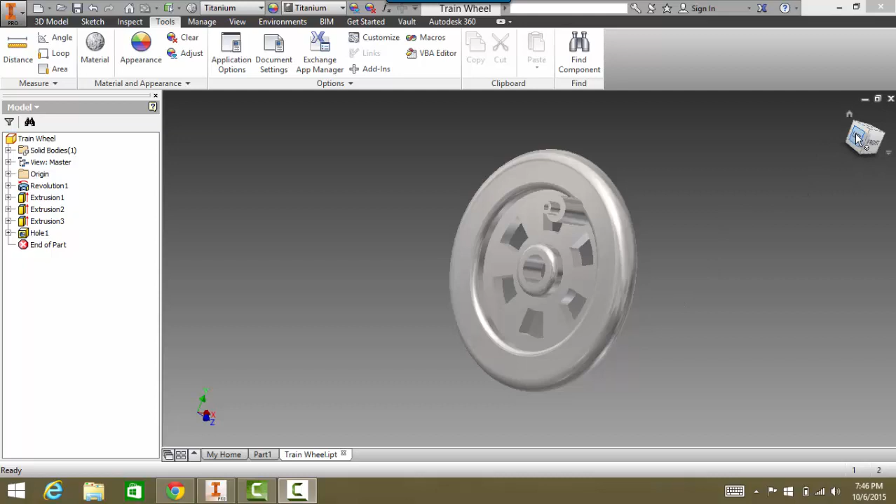All right, let's build the wheel. This is the last part of the train. Hoping somebody in every school will build a track as well so that it can sit on something all pretty. But this is the wheel, so this is our last part. Here's a wheel I built earlier. It's a nice titanium wheel. And we'll start from scratch on a wheel.

Like everything, we'll start with a 2D sketch. Now, I'm actually gonna not start with that 2D sketch. I don't want to go on this plane because I want it on a horizontal plane, because I'm going to build a profile, revolve it, and then I want the front to be actually a little bit different. Over here, this is even sitting weird, so I'm going to go like this. I'm looking directly down the top. All right, so there we go.

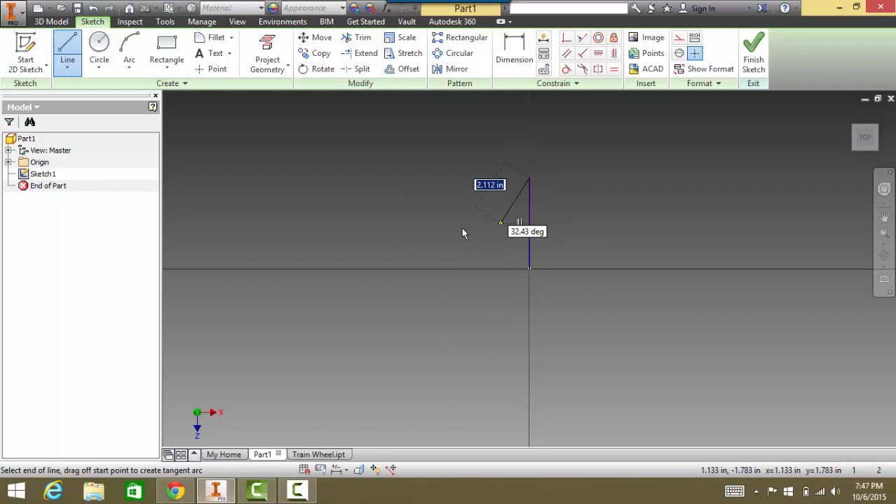So this, because I'm going to revolve, first thing I'm going to do is put an upright line right here. And the sole purpose of this line is to give me something to revolve around in a minute. Because I'm not going to have a shape touching the line, but I do have to have an axis to revolve on. So that's what that's all about.

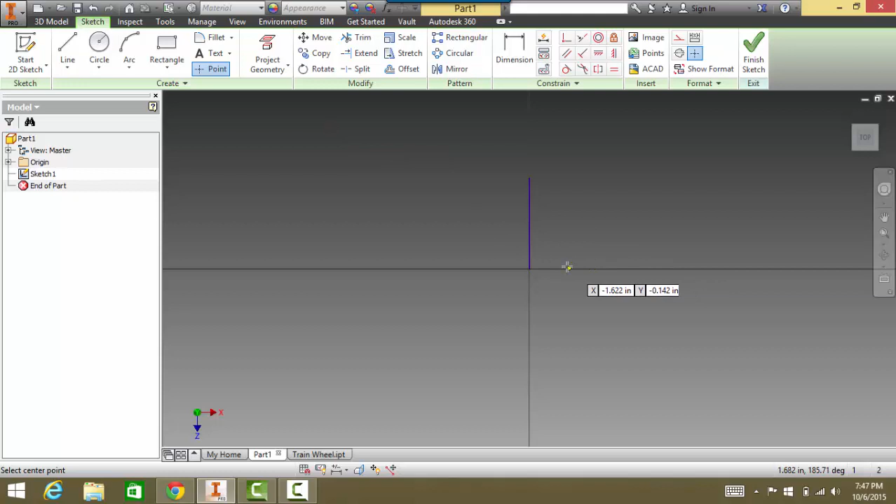Now, I'm going to put some points down. I'm going to put a point right here. This point is going to give me a starting point for a rectangle. So I'm going to have a rectangle start right here. And the rectangle, there's actually an axis, the hole in the wheel. I don't know what you call that. The hole in the wheel is 0.28. And that has to do with the axle peg we have, which is like 0.25, so there's a tolerance, all that sort of stuff.

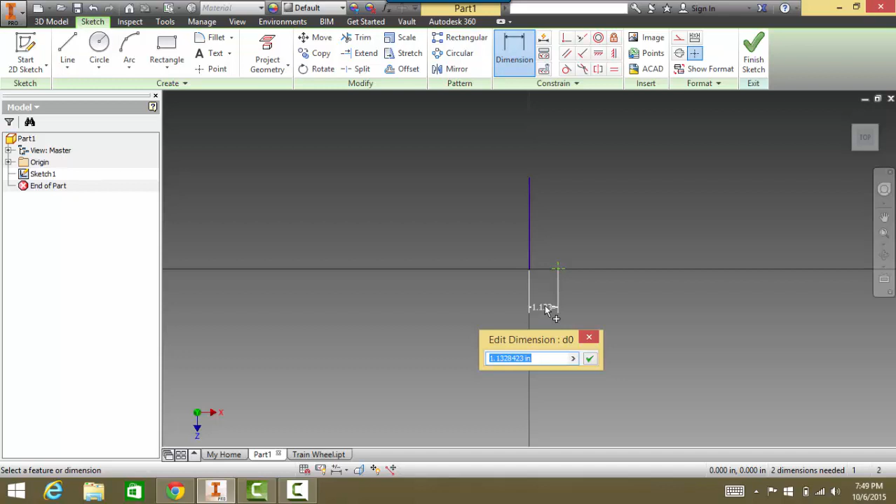Anyway, this is 0.28, but because I'm going to revolve it, I need just half of that, 0.28 divided by 2. Whoa, that's tiny. Let me zoom in on that. Right here is where I want to start a rectangle from, right on that corner. And come out here a ways. So looking at my drawing, this end of this rectangle is going to have a half circle on it. But before I do that, this point that is the center of that circle that's going to make the edge of my wheel needs to be 1 inch from here.

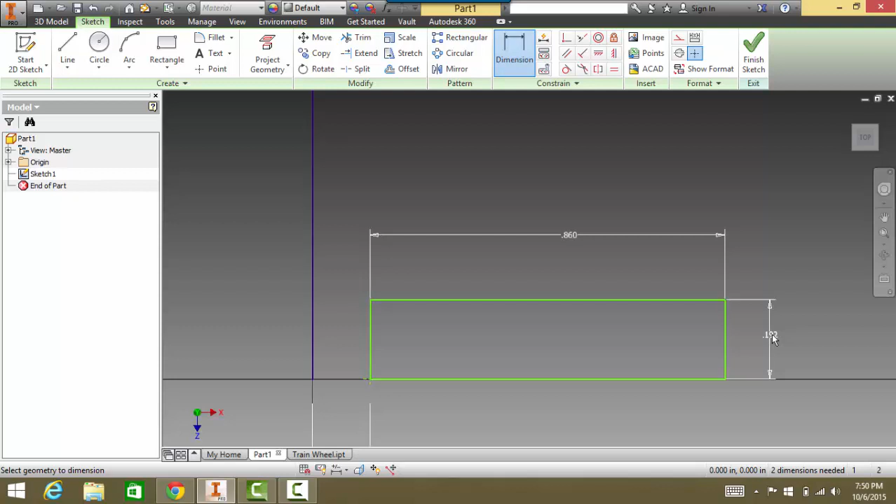Well, I'm not sure exactly what that needs to be, other than I know that from here to here needs to be 1 inch minus that 0.14 that was right here. So now it's 1 inch minus 0.14 plus 0.14, so this from here to here is 1 inch, and that's what it needs to be. I also have to do a dimension here, and that one I think is 1/4 of an inch. So let's make that 0.25. All right, so there's a rectangle that I'm going to start working on now.

I need a circle out on the end of it, right in the center, and make that have a diameter of 0.25. In a while I'm going to do some trimming, but I'm actually going to do a lot of building before I do any trimming in here. All right, so I need a couple more points. I'm going to put a point right in here, and I'm going to put a point right over in here. Now, obviously I'll need to dimension these 2 points.

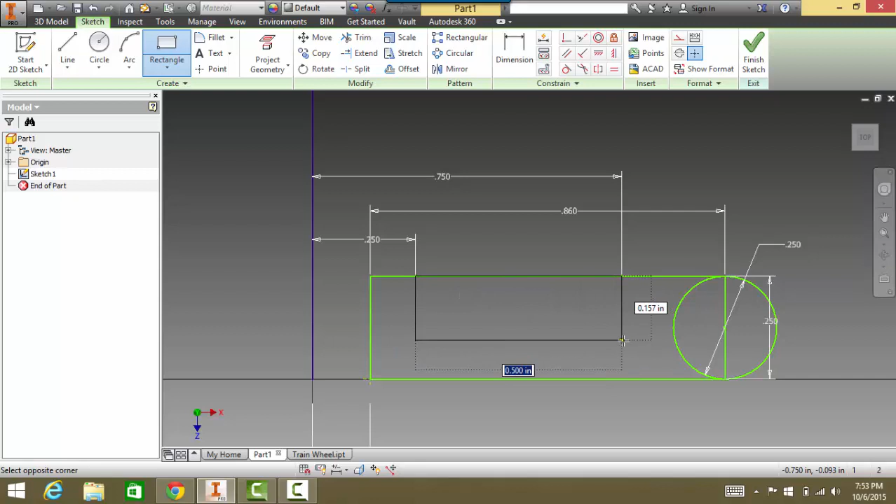This farther point, right here to right here, needs to be 0.75. This closer point from right here to right here needs to be 0.25. Now, the reason I did that is because right in here, I'm going to make a rectangle and then trim it out in a minute. So let's do that. I'm going to go right here and come locked into that point over there, make a rectangle. Now I need to dimension this rectangle right here. And that dimension needs to be 0.125.

All right, so we can start to see what's going to happen. I'm going to have this general shape revolved around this axis, but I have to do quite a bit of trimming up. I also want to do a fillet. And the fillet measurement I want is 0.0625, I'm just looking at that from my drawing. And it needs to go right there. Ooh, something is up weird here. It needs to go right there, and it is non-existent.

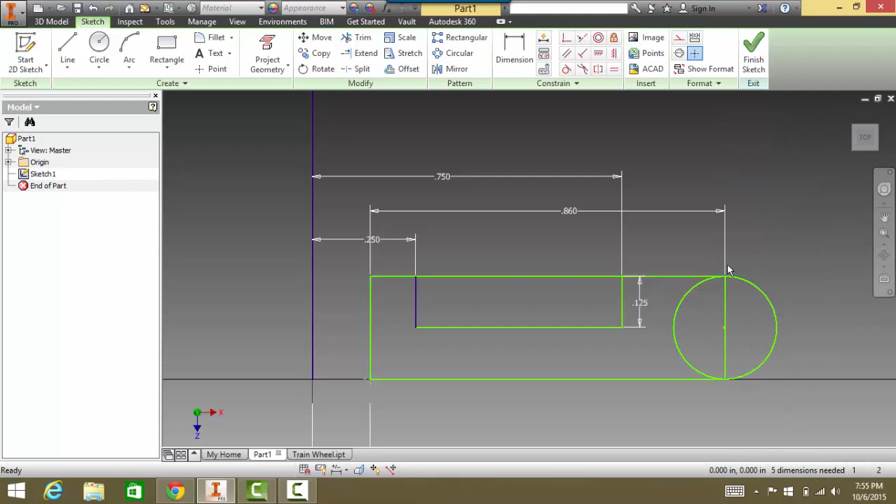Hang on, let's figure this out. Well, that kind of messed something up over here. So when I mess up, what I generally do is Control Z and try something different. So I'm going to worry about doing my fillet here in a moment because that messed it up. So now that I have all of this stuff here, I'm going to delete a bunch of dimensions and go about trimming off the stuff I don't need. So here we go with all these dimensions going away, so that when I go to trim, it doesn't give me that error message. And so what don't I need? I don't need this.

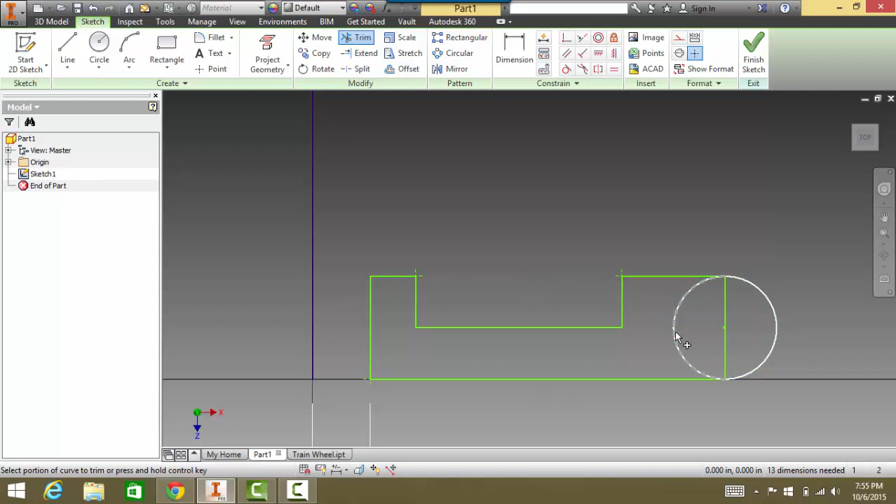I don't need here, here, here. That looks pretty good, really. Sometimes I miss something, I can come back and get it later.

But I think that's about what I don't need. So now let's go to the fillet. I've already entered in my 0.0625. And I want to fillet that corner right there, and this corner as well.

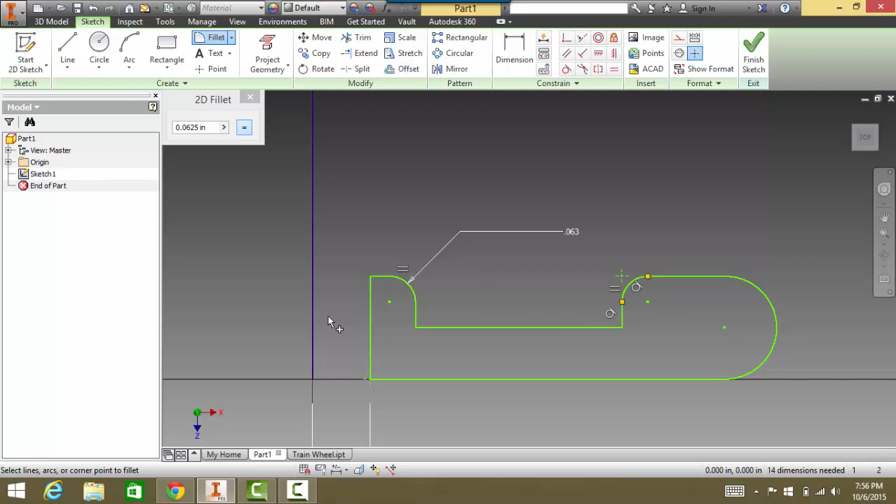So now I'm pretty close. This is the thing that's going to revolve clear around. So that looks pretty good. I'm going to finish my sketch. Kind of gives me a weird look on it here.

But now I want to revolve this thing. And it's messing with me a little bit as far as how it's sitting there. So, oh, I get it.

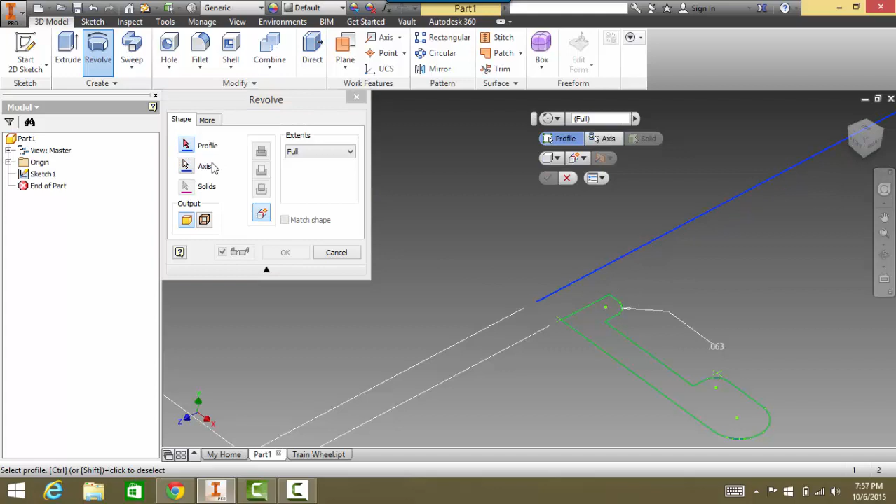All right, so I'm going to revolve, my axis being this, my profile being this. Wham, there it is. All right, let's spin it around a little bit, see what I have on this back side. Yeah, that's what I wanted to do.

So we've got it revolved and we're getting close. We've got to add some holes in it, and then I don't know what the deal is called that you hook the linkage arm to so the train can move.

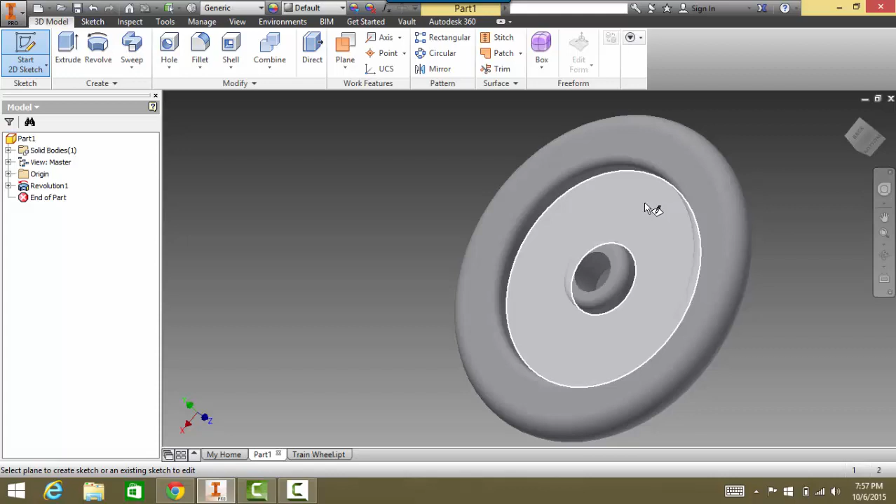All right, so let's do a drawing on here. I'm going to make a drawing on this face so it will square up to me. It's one of our first chances to do what's called a pattern. Maybe we've done a pattern before, I don't remember it though. And it also is going to give us a chance to dimension angles.

So what I'm going to do is grab my line tool and draw a line straight up. Actually, I don't know how far to draw that line yet, so I'm going to Control Z and not draw that line straight up yet.

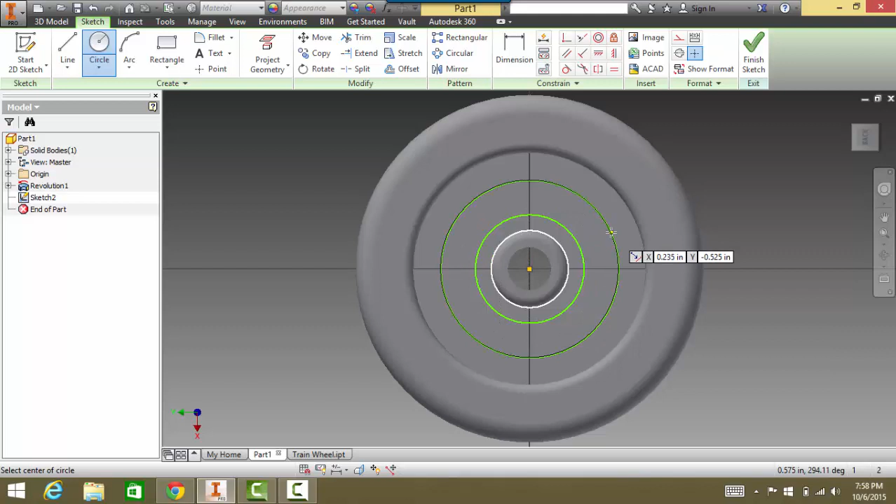What I want is a couple of circles. I want a circle right here, and then I want a little bit bigger circle out here. Now I need to dimension these circles so that we have them right.

So the smaller circle is 0.375. Whoa, something's not right about that. Oh, it's 0.375 times 2 because I was reading a radius. Much better. All right, that's my smaller circle.

My larger circle, this one out here, is 0.625 times 2 because it's just showing me a radius on my drawing as well. So now I have a larger circle and a smaller circle, and I'm ready for this line I was dinking around with earlier.

Put a line straight up. Hit OK. And then I'm going to put a line at some angle from there, like this. Now, I just realized I did something that might mess with me. So I'm going to Control Z.

I know this line has to go past that outer circle, but I don't want it to go much farther.

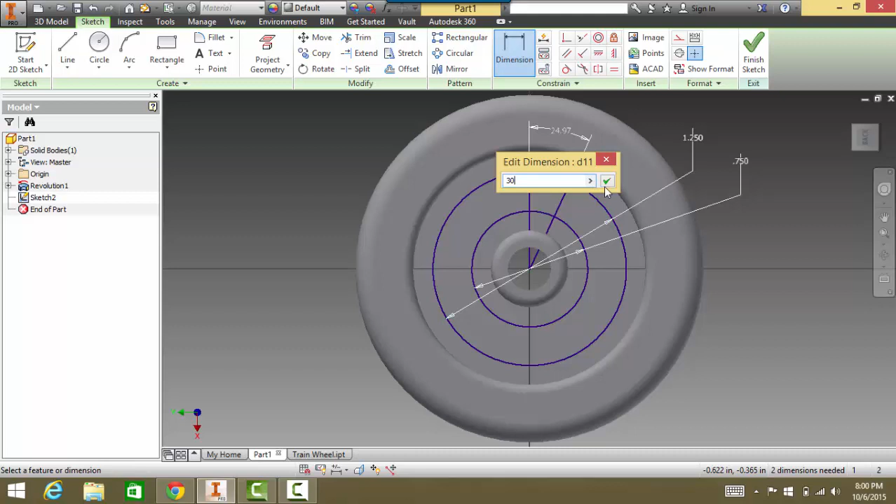So I've got these two lines, and I want to dimension them, not what they are, but the angle between them is what I'm concerned about. And the angle between these two lines is 30 degrees. So that's the first time I think we've actually dimensioned an angle between two lines.

That 30 degree, this little - I don't even know what you call that shape, sector, no, kind of the piece of pie looking thing, but without the pointy part - is what we're going to keep, and we're actually going to make a whole bunch of those.

So in order to make that work, I need to trim out a bunch of stuff, and so I'm going to get rid of some dimensions. Whoa, how come that's not letting me get rid of dimensions? There we go.

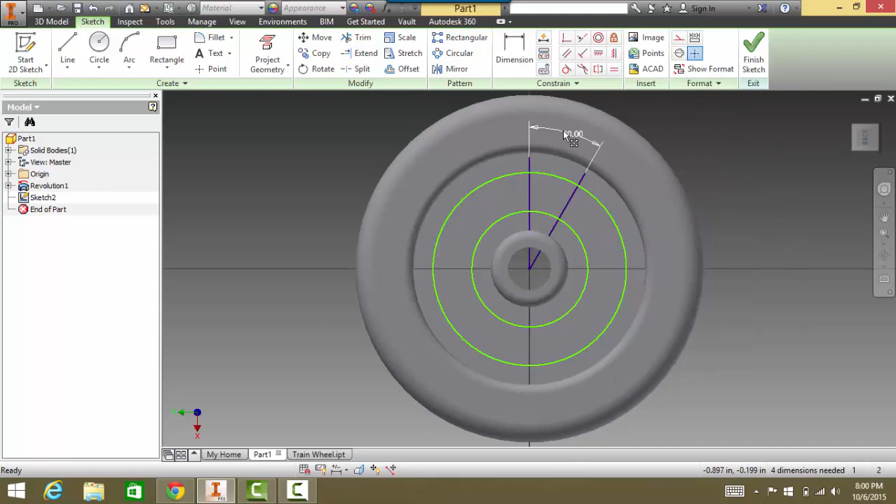Now what I'm going to do is trim out a lot of stuff, actually. All right, so all I have is that little - I don't know what that shape's called. I'm a math teacher, I probably should know that, but I don't.

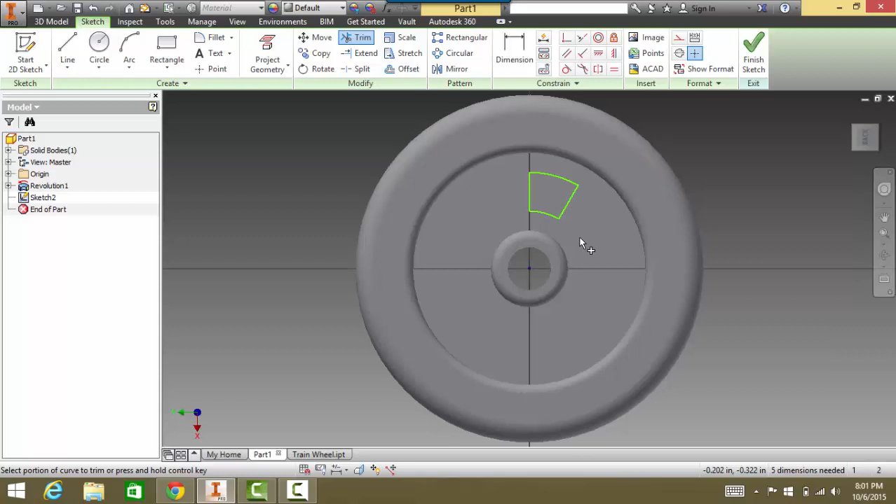And that's - oops, I guess I should have picked geometry first. Something's not quite working like I want it to. Axis, here, geometry.

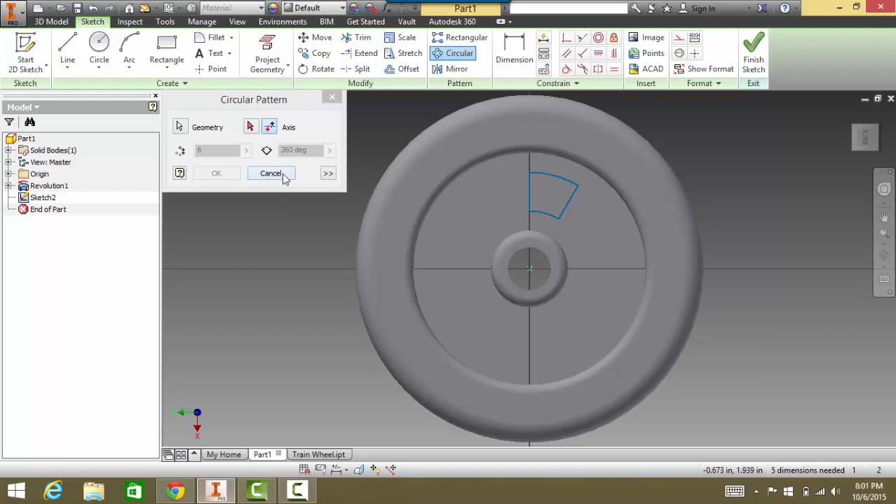Well, let's see. I'm not sure what's up with this, so I'll keep trying. You click on enough stuff and stuff happens. I think I did it with that arrow there.

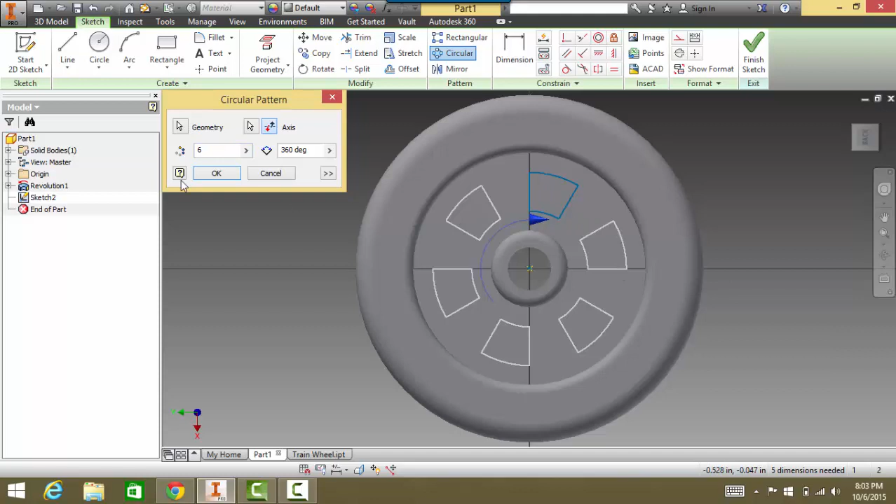I did need 6 of them, evenly spaced. It happened. Cool. Takes a little hunting and trying, and stuff works. But now I have this pattern going around there, and I'll finish that sketch.

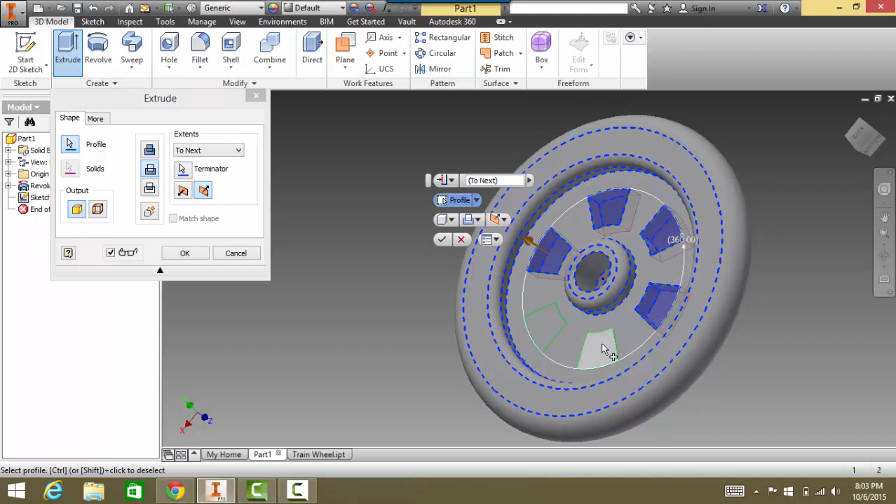I am going to pull this up and cut. I'm not going to go with a distance, I'm going to go with what's called 'to next.' I am going to click on each of these spots and cut them all out. Now I've got that pattern cut into my wheel.

So now I'm actually really close to done. I do need to put that thing the linkage arm hooks to right up here. In order to do that, it's a tough one to locate. I need to locate it right in the middle, and it actually sits up into the air a little bit.

I do know how far away it is, but what I'm going to have to do is draw some lines, on this face here. So I need a line going straight out, and I'll get rid of this line later. There's a line going straight out, and I need another line

going out at an angle from it, but that angle very specifically needs to be right in between that one, and that would be a 15-degree angle. So now we have a 15-degree angle, and I need to do that because I need to center the linkage arm peg thingy on it right there.

All right, so now if I plop a point at the right distance out there, that is going to locate that for me. So I need to put a point on this line, and the point on this line from the point to the center. Oops, that's not what I want to do. From the point to the center. Still not doing it.

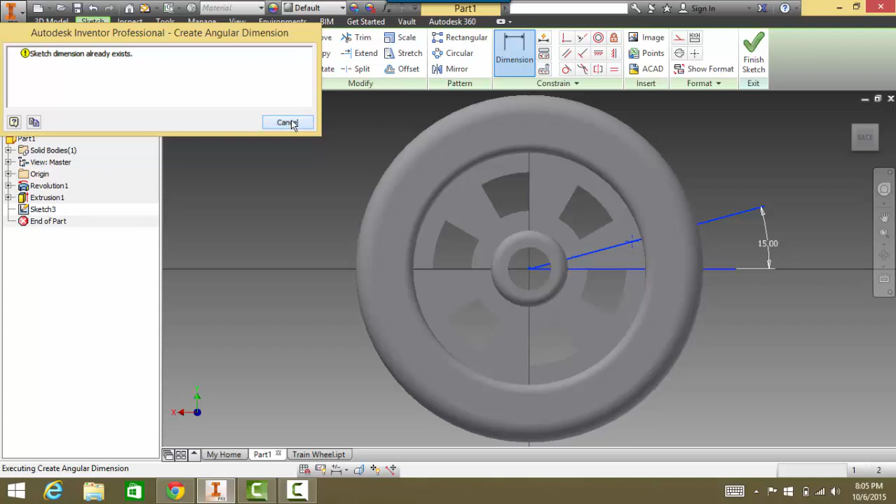Whoa. So from this point to this center, it's giving me some grief there. Let me get rid of a dimension. Let me get rid of this line. Ooh, that was weird.

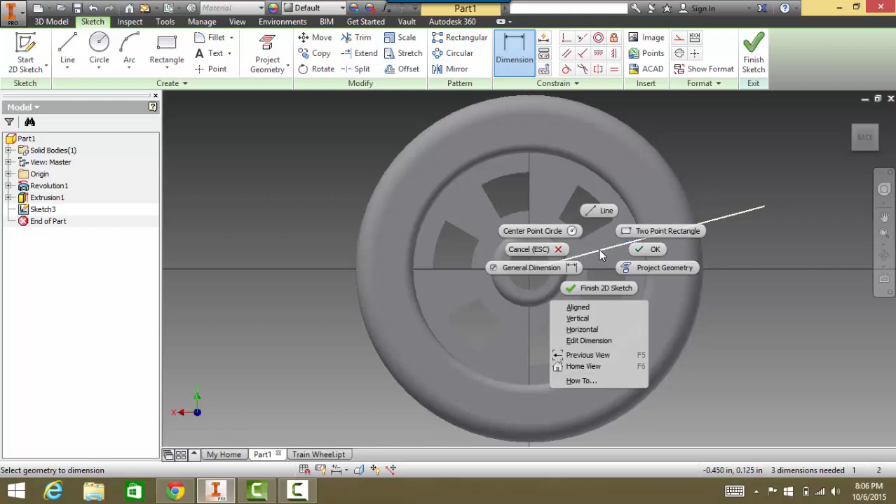Delete. Now maybe it'll let me dimension from this point. No, still doesn't like it. So I am going to get rid of this line as well. Now maybe it will let me dimension from the center to here. No, it won't. I did not have this trouble earlier.

Oh, that's what I want to do right there. All right, I do want to dimension it right there. It needs to be 0.7. Sometimes things don't happen as slick as you think they ought to.

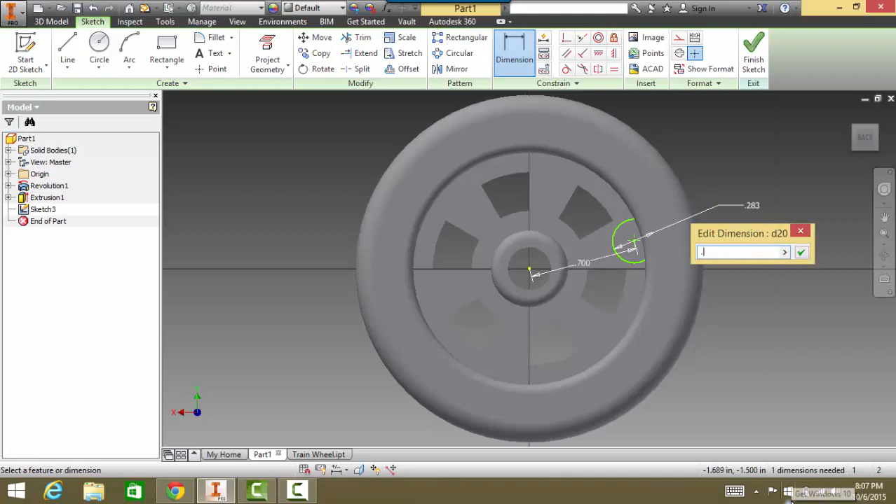I need a circle on that point, and that circle has a dimension of 0.25. Notice it kind of goes out into that wheel area, but it's supposed to. So it goes out in that wheel area with a dimension of 0.25.

I finish my sketch. I'm going to extrude this little circle right here a little bit, not that far. It needs to come up 0.375. And now it has this, it's coming out a little ways. Now it has a kind of step down that comes out again.

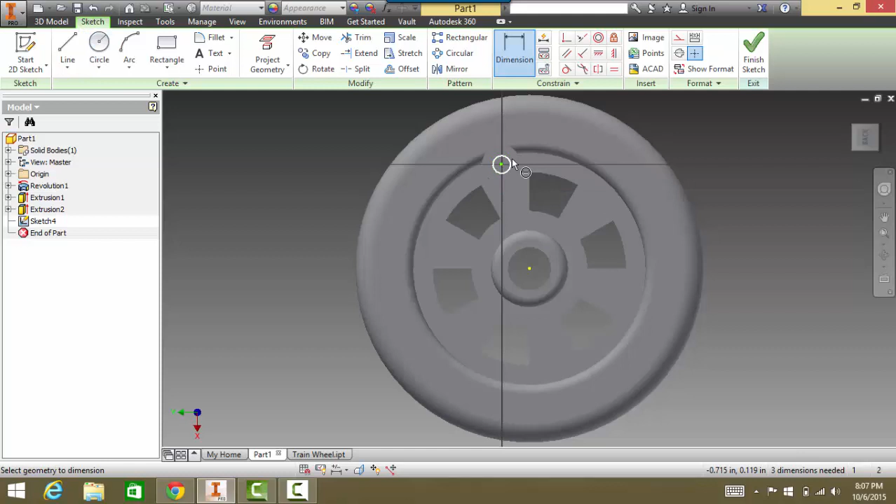So I'm going to draw a circle on that one, center it on there, and dimension that circle. That inner circle is 0.125, and I'm going to finish that sketch.

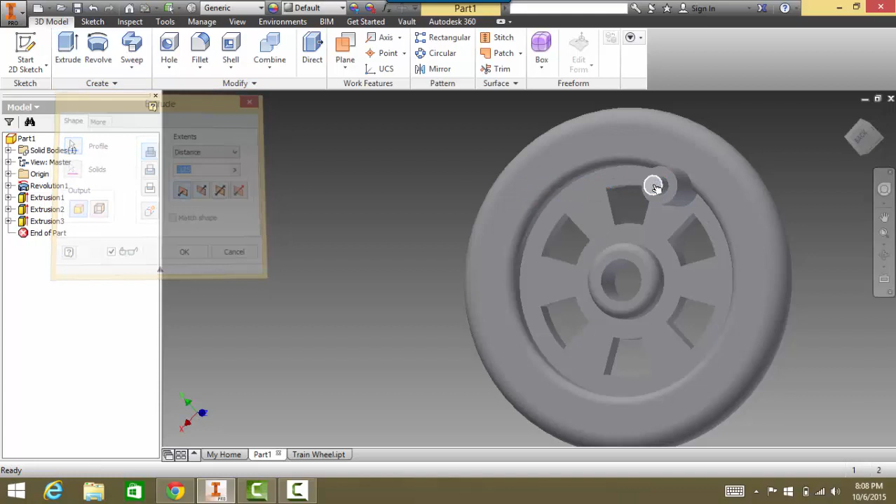I'm going to extrude that inner circle. It guessed which one, but only extrude at 0.125. And so I'm getting close, but now it has a hole in it, right in the very end of it.

So I got to do a sketch again on that tiny little circle. It's not very big, so I made a little circle. I'll blow it up a little bit. There it is. Dimension this little circle.

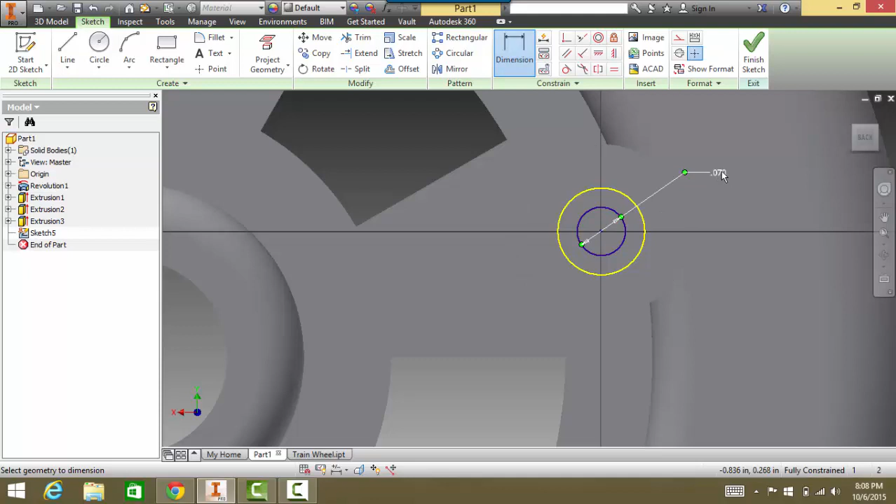Whoa, okay. And when we dimension that little circle, it is 0.0625. All right, so now we have a little circle on there. We finished that. Now we want to make in that little, I better zoom it up.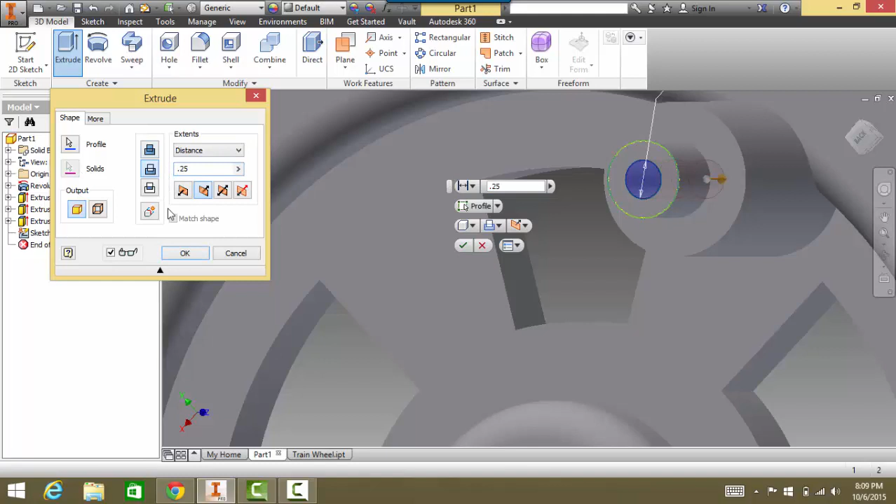I'm going to go after that guy. However, I'm going to cut inward this time, and that has a depth of 0.25. Oh, something didn't like that. 0.25. And so that's all going in there now. Let's see how we look.

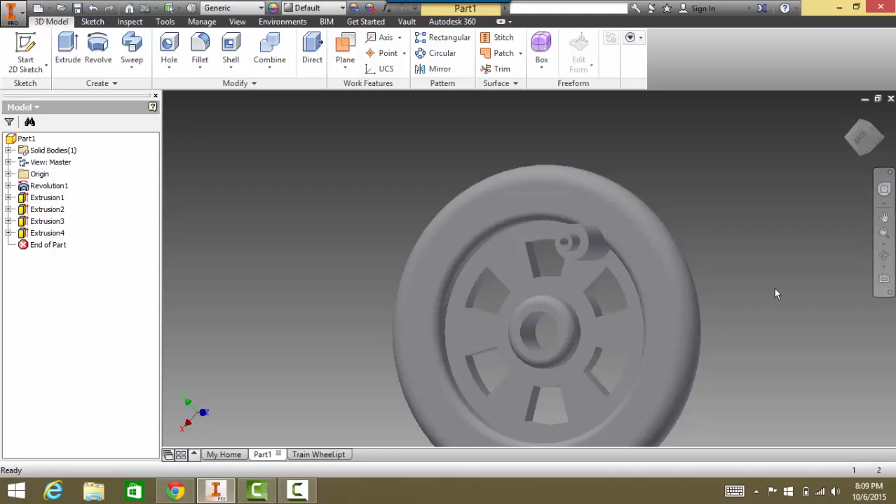It's looking pretty good. I think I'm done. On a couple other builds, you'll notice every now and then I'll forget to do something, and somebody in my class catches me on it, and that's fine.

But I think that this is good to go. I don't think there are any fillet edges or anything like that. Now we're just a matter of maybe we want to mess around and go tools, material, and who knows what do we want to make it look like. Cast bronze or something, I don't know. It looks pretty good. Looks pretty good to me.

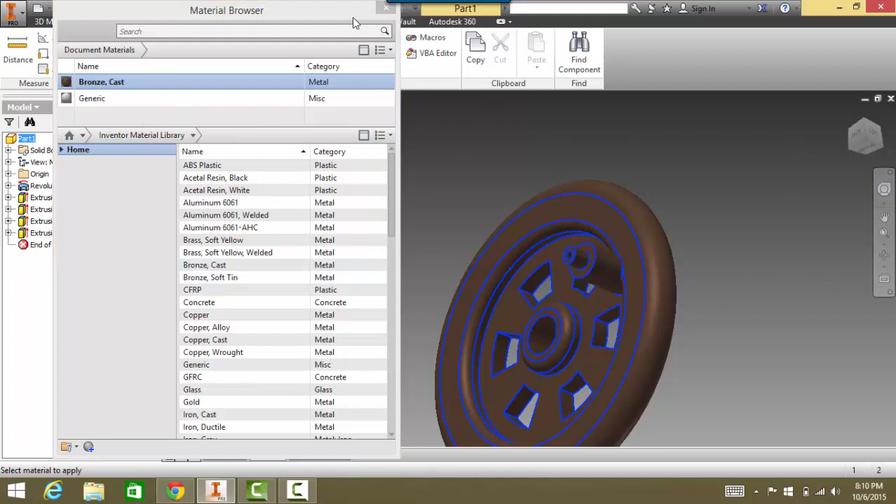All right, we built the wheel, and we're about ready to throw a train together now. Looks pretty good. Cool.